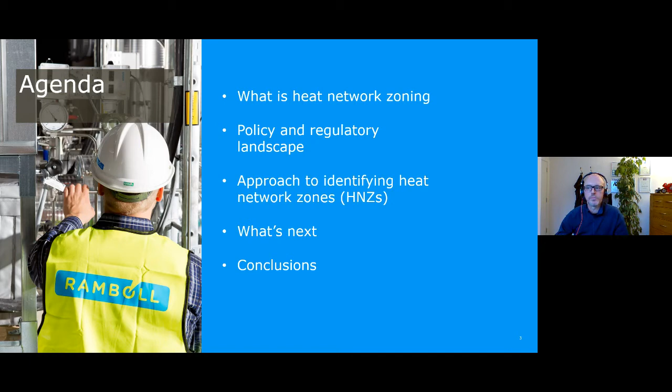So very briefly, what do we mean by heat network zoning? It's about energy planning, specifically for heat networks in this case. We need to consider that a heat network is a long-term investment in energy infrastructure. It has the potential to cover very significant geographical areas, and by virtue of that, there are many and multiple stakeholders involved in both the planning and delivery of district energy or heat networks specifically. When I talk about heat networks, we shouldn't overlook that there may be opportunities for cooling networks to be developed alongside that.

The importance here is that because of the long-term nature of these infrastructural assets, they should be and need to be planned strategically - we're talking 50, 60, 70 year investment projects here. The zones themselves are focused on trying to identify where heat networks could be the optimal technology choice within a particular geographical area, recognizing that there are multiple potential solutions to decarbonize heating, of which district heating is one, but by no means the only technical solution.

The typical approach, which we'll come on to shortly, is to be very much demand-led. So we're looking at areas where there is a high level of density of energy demand, of heat demand. But critically and importantly, as we move into the net zero future, we need to look at where there is availability of low carbon heat sources, of which Donna was referring to several in her presentation.

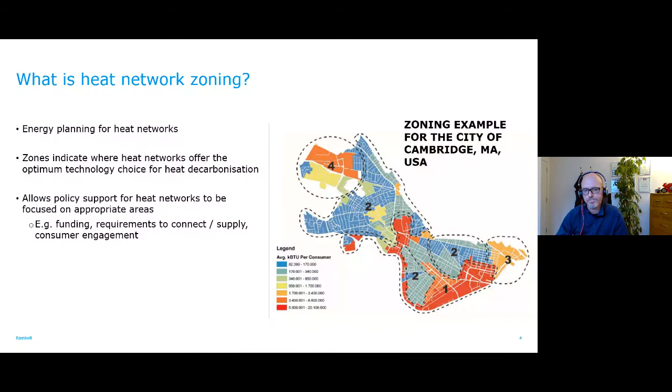The picture on the right is an example of some zoning that we've done relatively recently in a US city, in Cambridge.

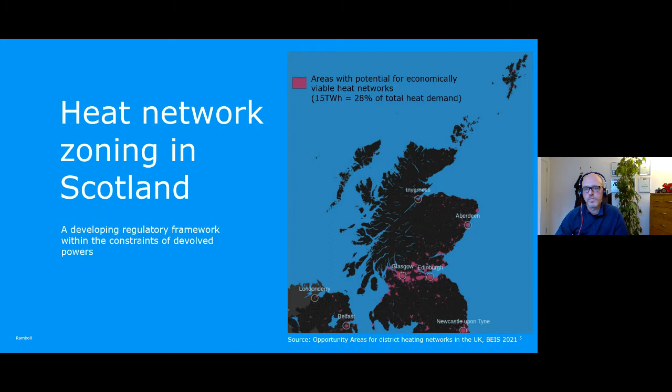The Heat Networks Act was legislated just this year, and it's a really interesting piece of legislation. Some of the key elements involve licensing of heat network operators - the intention is to drive up standards and improve customer confidence in district heating, bearing in mind that it's still not a well-established technical solution in the UK.

It will provide certain rights to operators of networks, similar to what traditional statutory undertakings might already be used to and require to perform effectively. Importantly, it will place duties on local authorities to review their regions for the opportunity for district heating, and give them the power to designate an area within their region as a heat network zone. Lastly, there would be a permitting system, providing the licensed operator with a permit - effectively exclusivity to own, operate and develop a network within the zone.

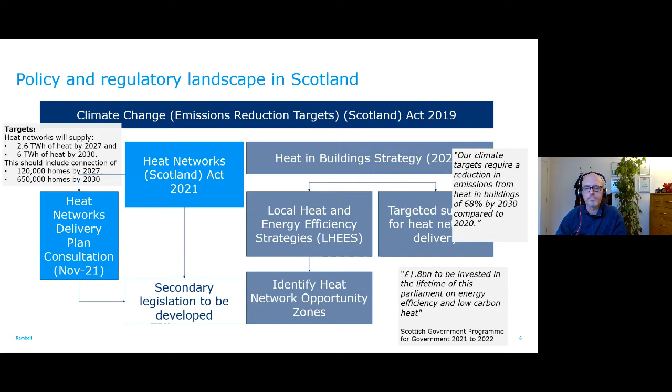Just in terms of an emerging approach, the Scottish Government's looking to achieve two fundamental things. One is to ensure that there is incentive for investors to come and participate - so it's not just about public sector, it's also very much about private sector capital, entrepreneurship and initiative. But also, they need to be affordable to consumers' networks, so there needs to be some level of regulation - the implication being to ensure that customers are getting a fair deal.

Opportunity identification led by what's called a linear heat density, as a proxy in terms of where heat networks might be viable. Then moving into opportunity prioritization - looking at not just that initial proxy, but also more specifically at financial, technical, and other considerations like fuel poverty, brownfield investment regeneration, and so on. These are contributing considerations towards prioritization of network opportunities and zones. Then lastly, moving into more recognizable analysis of specific opportunities through techno-economic evaluation.

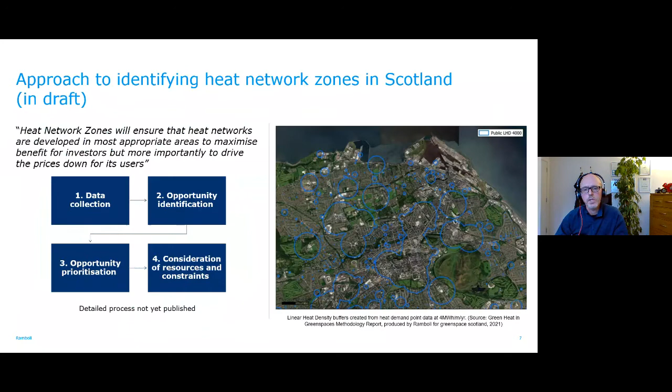Methodology continues to evolve. There'll be more guidance on that off the back of the heat networks delivery plan consultation mentioned earlier on. And of course, the LHEES methodology continues to be tested through 2022.

Lastly, just a couple of points around challenges. Devolution has brought a lot of powers to the devolved nations, but there are still constraints, particularly in the energy sector - the gas and electricity networks are not devolved, they're still controlled at a UK government level. Also, there's a big impact of this scale of change in terms of skills, resources, and capacity to deliver. Local authorities as the change agents - many of them are stretched, many don't have significant resources, and they need support.

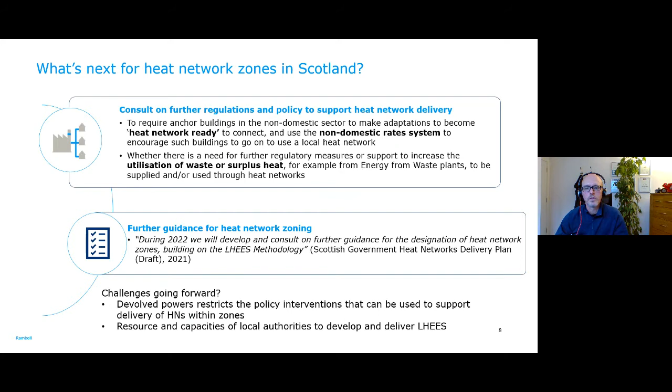I'm conscious I'm running on a bit, so please speed me up if I'm taking too long. In terms of the English, I'd say five minutes, guys, so you probably have time to finish out your presentation. Sure, thank you, Dara, I'll accelerate.

The English position is slightly less in terms of the opportunity of percentage cover, but it's far bigger in terms of the potential heat supply from district heating. Notably, a lot of the heat supply from district heating in the UK is in England, more than 90% of it, and a big amount of that is in London - about 25% of the district heating supply is currently in London.

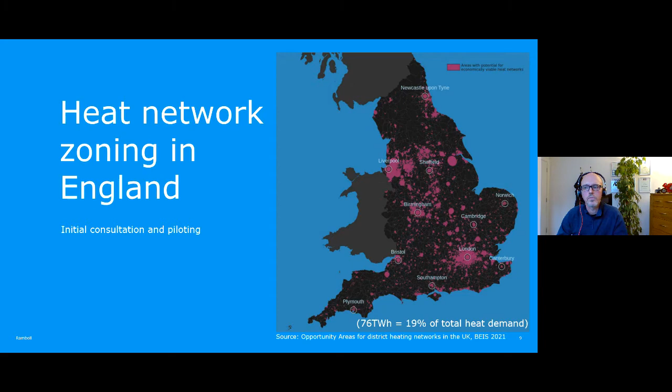There's a consultation being published by UK government on heat network zoning, published in October. The context is worth mentioning: we, along with other consultants, have been working with BEIS over the last two years on looking at city-scale heat decarbonisation, of which district heating is an element. Out of that work came the concept of the value of zoning, the importance of zoning. Consequently, in parallel to this ongoing work, the methodology zoning approach has been developed through the course of this year, and that led to the consultation.

England is looking at where zones can provide the lowest cost, low carbon solution, as you can see in the box there. I've highlighted three key aspects to the consultation. One is about to what extent consumers can be mandated to connect. Second is about emphasising that this is now about low carbon heat, so we're moving away from the traditional gas CHP-led district heating systems prevalent across the UK right now. The third point is about having a robust and standardised methodology.

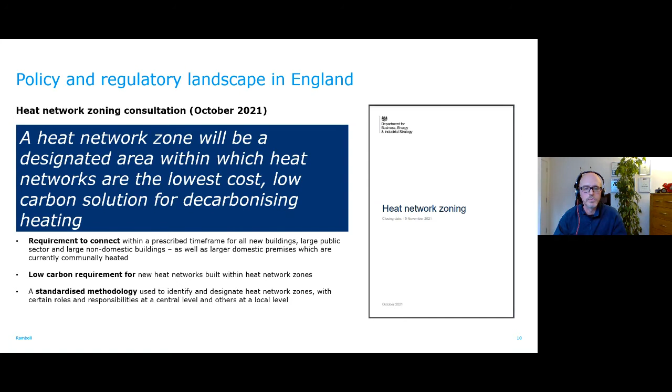Methodology starts at a national level, identifying areas of opportunity, government led, moving into local. This local level is about refinement, designation, engagement with local stakeholders, and ultimately delivery. The second element is about feasibility. Having designated the zones, it's about identifying specific networks within those zones, how they might connect up in time within and across zones, and then moving forward into a delivery pathway through procurement.

In England, there is a funding mechanism to support that. There's the Heat Networks Investment Project, which has been ongoing, and that's now being superseded by what's called the Green Heat Networks Fund - a capital-based support fund, hundreds of millions of pounds, to support network development.

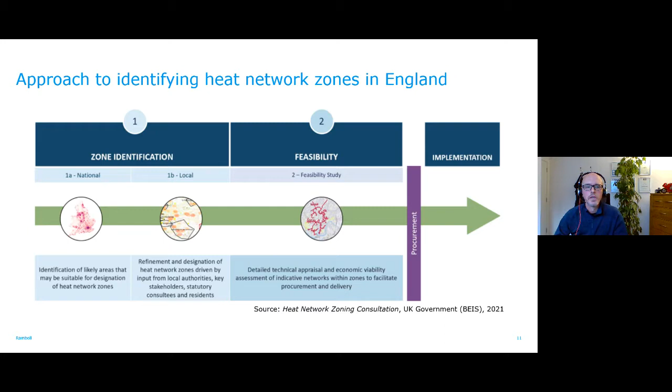Some challenges: there continues to be a disparity between business-as-usual gas boilers versus the currently still more expensive low carbon solution alternatives. There's the issue around demand assurance - how far can government go in terms of mandating connection? There's the issue about low carbon heat supply and its availability, which is critical to deliver these heat networks. And lastly, what happens if a zone is designated? How do consumers respond whilst there's that sort of limbo period between when the network's available to connect and when potentially a consumer needs to replace their existing heating system?

Lastly, quickly, conclusions. Both governments are looking at a standardization of methodology, as hopefully I've been able to show you. Local authorities are critical to both refine and coordinate delivery of these zones. There will need to be new powers provided to local authorities to enable that to happen and to address the demand risk, which I've mentioned a number of times.

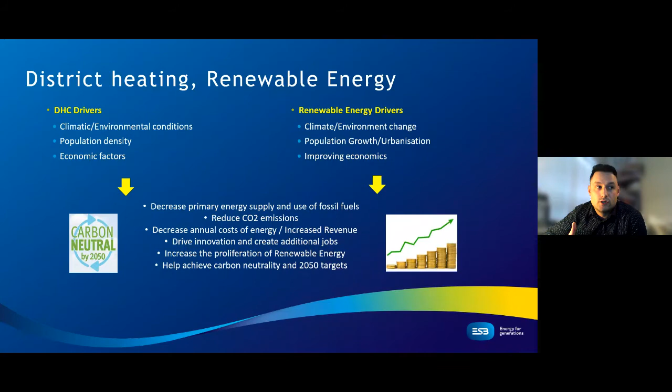Now you'll hear me talking about the scale and size of it - it really is quite breathtaking when you see some of the photos later on here on the sheer size and scale of it. It's an investor-owned project in Norwich and Bury, located around an hour north of London Stansted Airport on the east of England.

Just to give you an overview of the main plant we installed: Site 1 is at Crown Point, Norwich - just over a 16-hectare glasshouse, with an Anglian Water treated final effluent source about 2 kilometers away. We have 16 2.1 megawatt heat pumps. Apologies, there's a typo on the screen where it says kilowatt thermal demand and kilowatt electrical - that's actually megawatts. The CHPs have been sized to accommodate the electrical load on site, so we have 3 1.2 megawatt CHP units, and also gas boilers in the event of a power outage. There's also an emergency diesel generator to supply heat in the event of a power outage, or to give the HT thermal storage a bump in temperature as required.

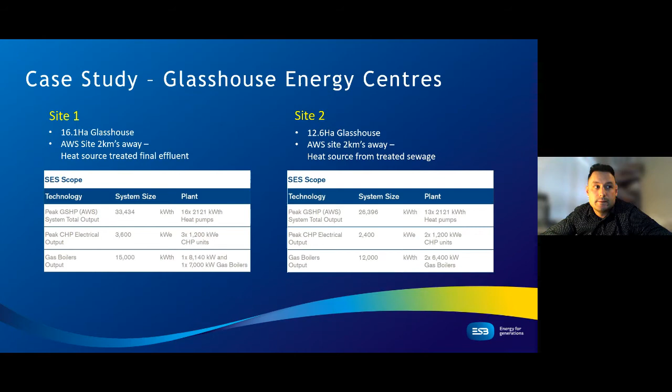On the second site in Bury St Edmunds, it's largely similar, just slightly smaller - one glasshouse as opposed to two smaller glasshouses, just shy of 13 hectares. It's the exact same principle, almost the exact same project, just slightly smaller. We have 13 2.1 megawatt heat pumps, one CHP less, and 2 gas boilers which are slightly smaller in capacity, around 6.5 megawatts each.

Coming into the greenhouse energy concept, starting at the bottom of the slide: on the Anglian Water site there is a final effluent discharge. Right at the last leg of that discharge we tap into it, running effluent at temperatures anywhere from 10 to 25 degrees into what we call an abstraction chamber. From that chamber there's a series of submersible pumps located internally, which pump through heat exchangers and directly back out to the river at around 3 degrees or above.

On the opposite side of that heat exchanger there is the heat transfer fluid line. The sewage heat recovery site to the energy centre is in the 2 to 2.5 kilometre range I previously mentioned. That takes it up to a continuous closed loop coming from the opposite side, which is actually an open loop.

The heat pumps take that temperature range of between 10 and 25 degrees and upgrade that heat through the refrigeration process on site to a usable upgraded heat in the region of 35 to 55 degrees. That is sent into the low temperature thermal energy storage buffer vessel, which is then utilized and circulated throughout the greenhouse itself.

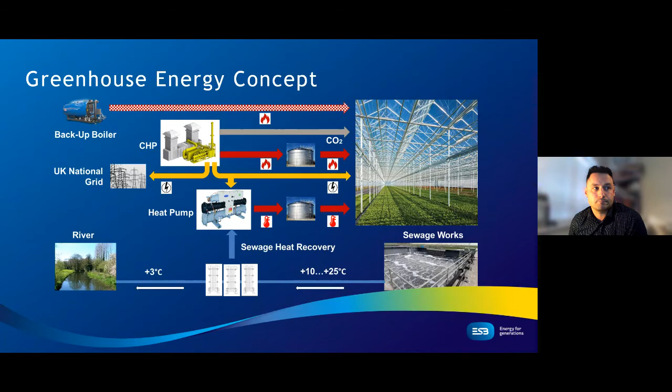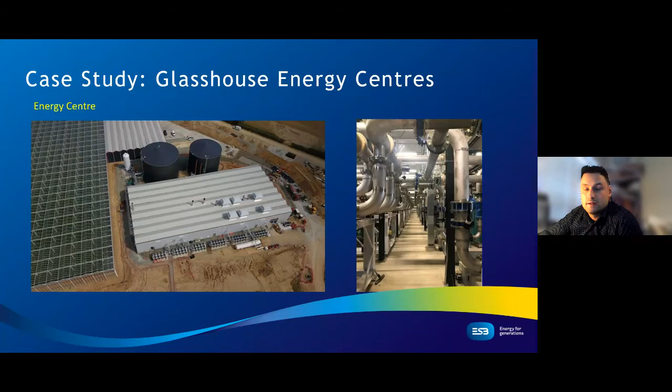So this is just some additional photographs from on site here. The photograph on the left hand side is actually the Bury site. The previous one was the Norwood site, but the two of them are identical. Our installers did a fantastic job there, in fairness to them.

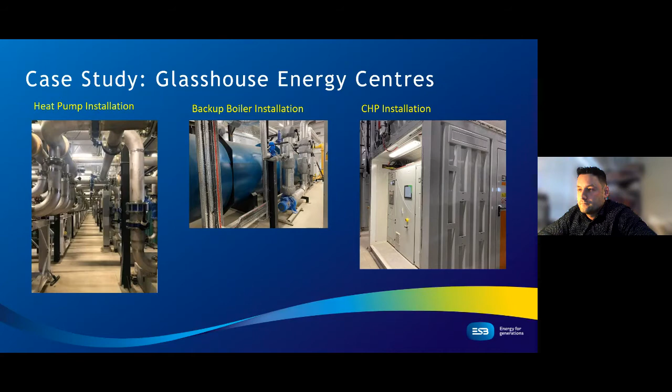Those packing houses are basically supplying on the Crown Point Norwood site. It's predominantly peppers. So the Crown Point Norwood site supplies up to around 13% of the UK's requirements, and on the Bury site, they can supply up to 10% of the UK's tomatoes requirements, which is the equivalent of around 10 to 20 tonnes a day that those pack houses can take out from site.

So we've just finished the planting season by 2021, and we're just preparing for the planting season in 2022. I suppose the main message that I'd like everyone to take out of this presentation is that this project gives an overview as to how combining several different sources of energy can provide a solution, but the end user doesn't necessarily have to be a greenhouse.

It can be a block of flats. It can be potentially a city as a whole. The equivalent of the thermal demand that we're supplying is the equivalent of supplying up to potentially 20,000 homes in the capacity that we've delivered there. So moving into the next slide.

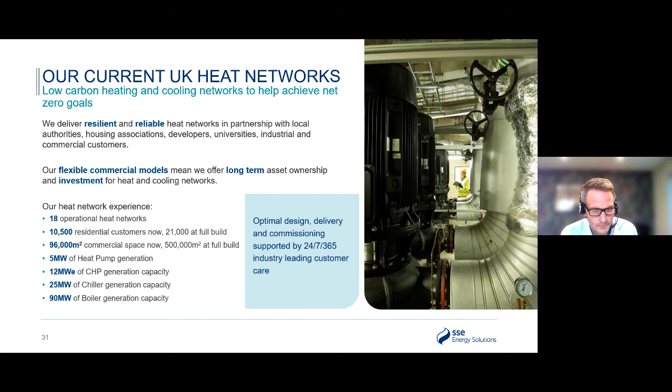I wanted to touch on an example of a project we're developing at the moment. Hopefully I can come back in a year or two and show you some impressive images of the site and the development work, but at this stage we're at the development stage. I bring this one up because I think it's an interesting example at one end of the ownership model spectrum, in terms of how schemes can be deployed.

What we're doing is, to the west of the city, there's going to be another new energy-from-waste plant being built. We're working with the owner-operator of that waste plant in collaboration with Leeds, who are effectively providing an enabling role - designating, not formally as a zone like Guy described, but effectively an area in which we'll work with their blessing and support to engage with potential off-takers for a new heat network. Where we started is with the all-important anchor load.

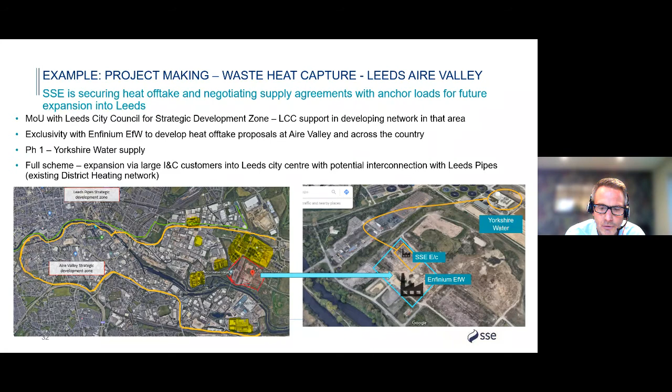So, in terms of lessons learned - certainly the UK lags behind lots of European countries in terms of scale of district heating deployment and the years district heating has been a core technology. But in terms of what we've learned in the UK, I hope a lot of this will be relevant to Ireland's journey in deploying these networks.

Just to pull out some practical examples - enabling plants to be easily maintained, easily replaced, and for you to be able to bring in contingency plans if the worst does happen, like temporary plant. Ease of connection - very practical things that you don't always get if you don't have the long-term perspective on a network. So what we bring to the design process is that understanding of the operational phase of a project, and what you need from that design to make it as safe, simple and cost-effective to run. So that's really key - time spent at the outset on your design is fundamental.

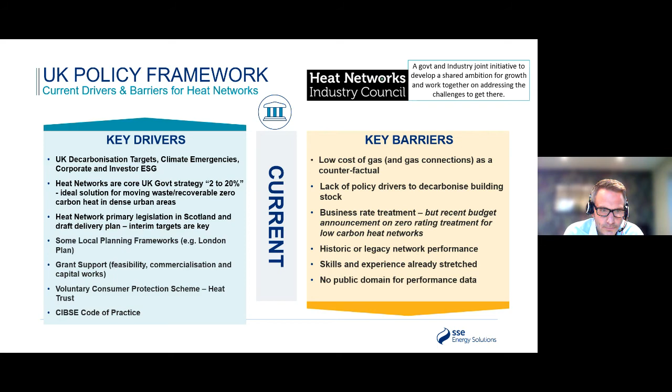And in terms of the future here, we've talked already about zoning. I think that's absolutely fundamental. I think we're starting to see the roadmap towards the end of natural gas in terms of new properties, and the UK government starting to talk about ambition for there being no replacement of gas boilers possible from the mid-2030s. Those two things are going to be fundamental, creating that roadmap and journey, a bit like announcements around petrol and diesel vehicles. It starts to get people thinking about where they need to be in 5, 10, 15 years time, which is fundamental.

And on the right hand side there, what will remain, as we've touched on in other sessions, is the skills gap that we have in the UK, and the need to train and develop right across the project development life cycle in terms of skills. That challenge for local authorities is front and centre in terms of strategically planning and deploying these networks. It's going to be challenging, and we'll need help in terms of expertise and capacity, and ensuring we can do this affordably. That's where I think heat networks have got a key role to play, because to my mind they're going to give us the best potential to provide affordable heat for people in the right areas, keeping things as close as possible to where we've been historically with gas costs.

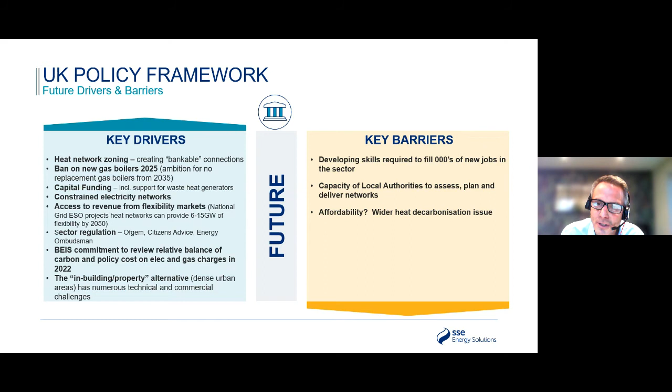So the last area to touch on quickly is to have a little look at some of the complementary drivers, objectives, capacity, powers, effectively, that sit with the public sector and the private sector. We've run quite a few workshops with various local authorities in the UK, and walked through the development, deployment, operation of a heat network system, and walked through appetites for risk and control as we've gone through that, to understand where they sit.

And generally, I would say the conclusion has been that a public-private partnership in some shape or form, potentially a JV, is very attractive, and it brings together a pretty complementary set of skills. At one end of the spectrum, you have the Leeds example I gave earlier on, where effectively the local authority is enabling something to happen. At the other end of the spectrum, the local authority might completely insource the entirety of the project. But on balance, we sit somewhere in the middle, helping the public sector to plan and deploy these networks with the skills and experience we've got in the private sector. I would say particularly that investor operator experience is really important—businesses that have invested in and are operating existing networks and understand what needs to be done effectively to make tariffs as low as possible and networks as efficient as possible.